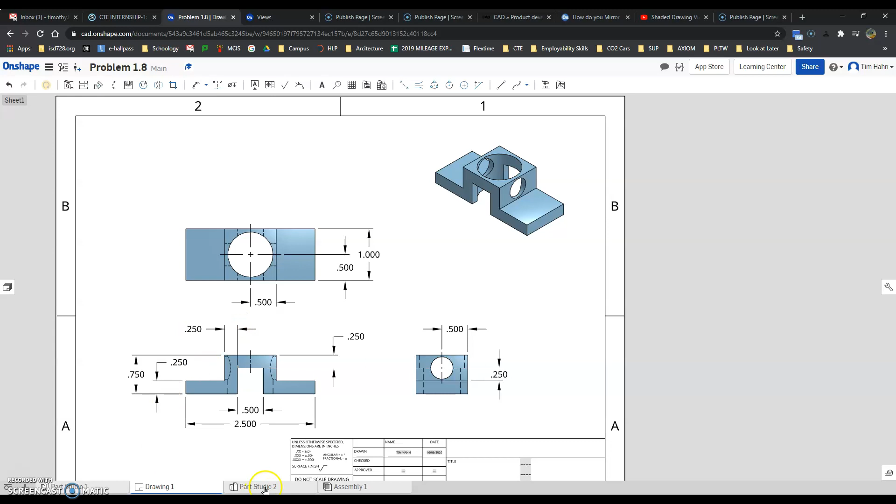So I'm going to go sketch, front view, and the difference here is I'm going to right click and go normal to sketch plane. I'm going to do a rectangle, but I'm going to do a rectangle up in the middle of nowhere, because I want this center plane here to be in the center of my part. I don't want to start it on the origin.

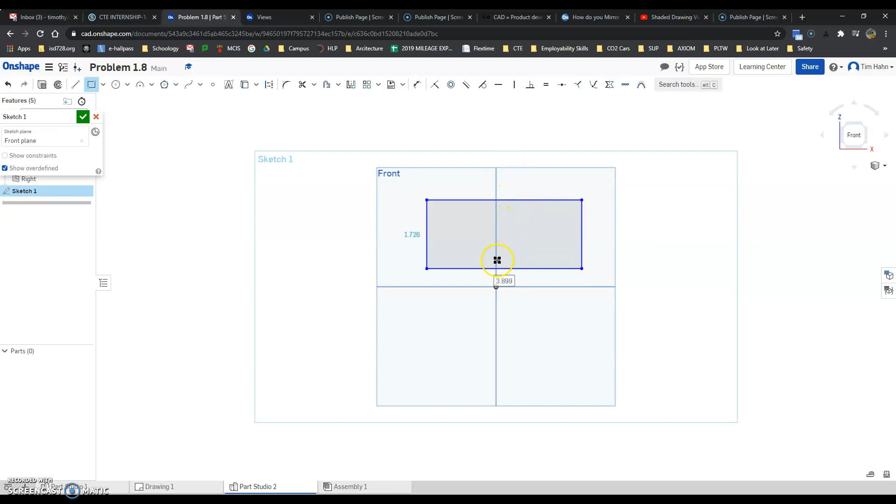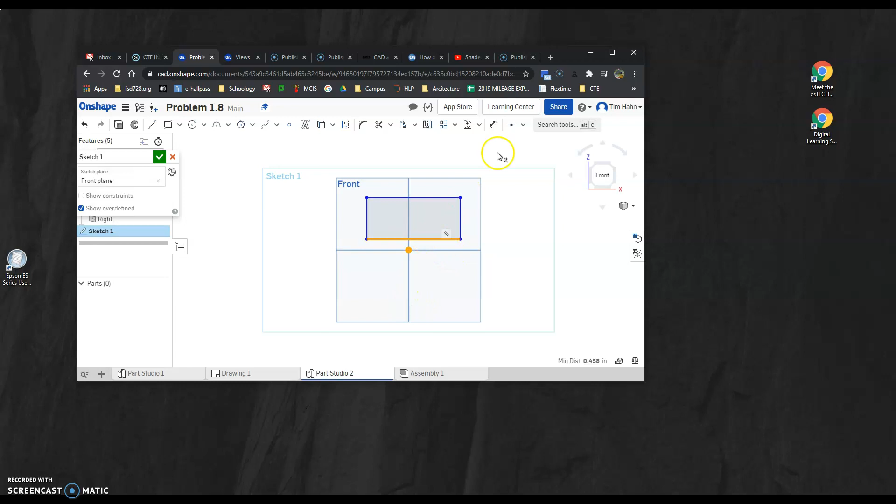So I'm going to take this item, and it might be hidden a little bit, so I'm going to show it so it's hidden. I just shrunk this down so it's hidden for you. So I'm going to click on here where it says coincident, and I'm going to go to midpoint, and I'm going to take this point and this line and lock them to midpoint to each other. So now what that's doing is if I stretch one side, it stretches the other side. So this is a symmetric part. There's a line of symmetry, or it's a mirror image right over this edge.

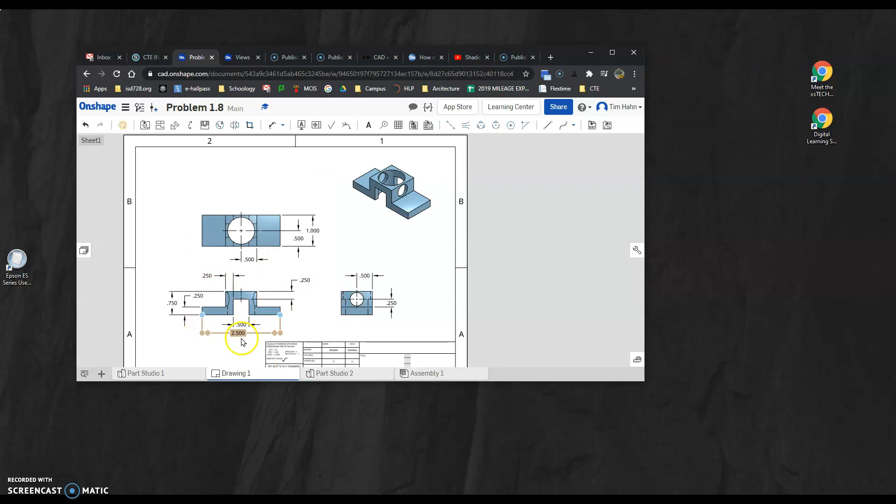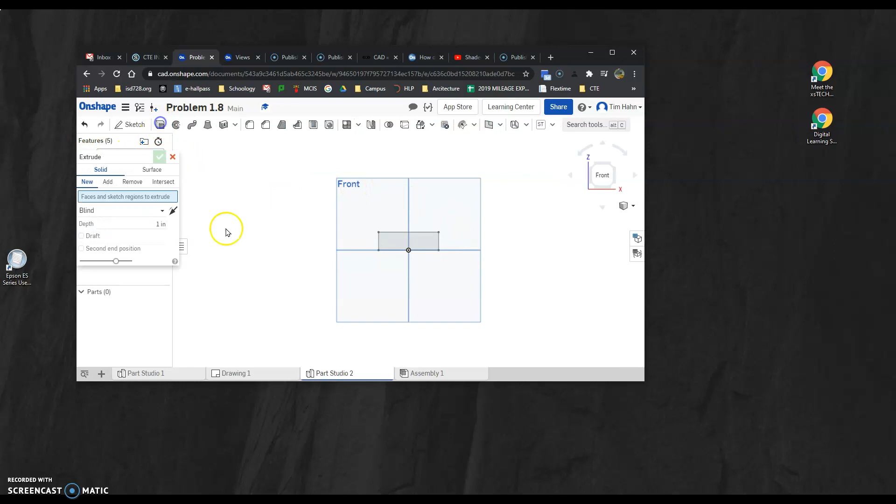Now I can do my dimensions. If I go back to my drawing, it's 2.5 wide and 0.75 tall. So come in here, 2.5, 0.75.

Check that off, extrude that, because we're going to get our base feature. I can go into isometric view, and I got to look at the drawing again quick. It goes 1 inch, so that's blind, 1 inch. I'm happy with that. So there's my base feature. So now I have my piece that's this solid out.

Next, let's manage this piece right here. Let's cut this out. If I'm looking here, it's 0.25 thick. So I'm going to draw a rectangle from this corner down, going 0.25 there. Oh wait, I have a 0.25 over here as well, but I don't know where this is, so I got to cut the center hole out first. It's 0.25 down from the top, and it's 1/2 inch wide, or 0.5 wide. So let's go catch that. We're going to do a sketch on this front surface.

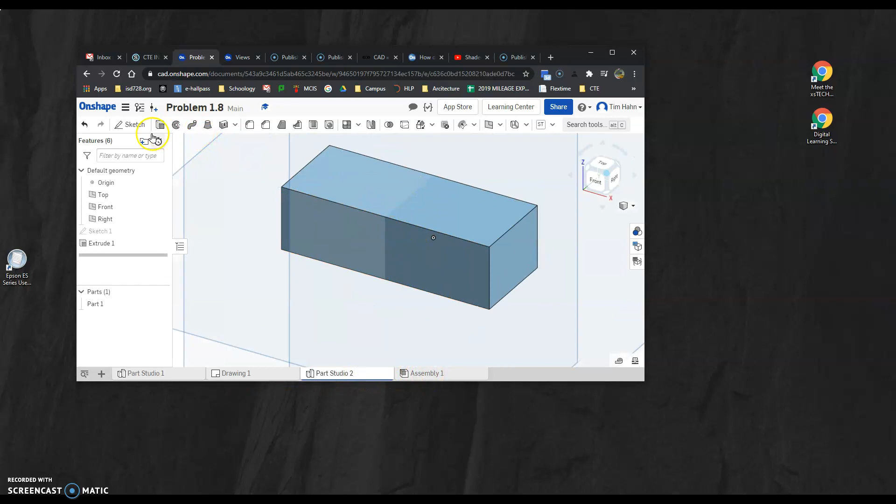Again, I'm going to draw a rectangle out in the middle of nowhere. I'm going to go midpoint again, so go here, midpoint, click my line, click my origin. Now this is staying right in the center, and I can do dimensions.

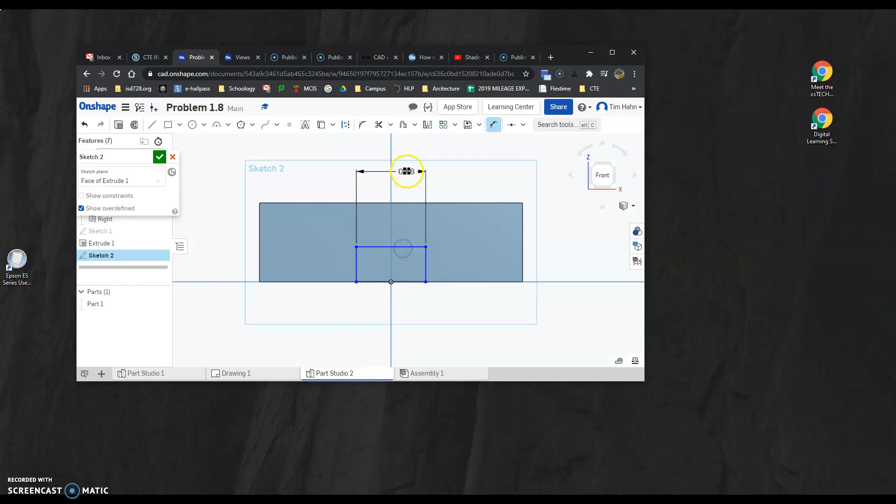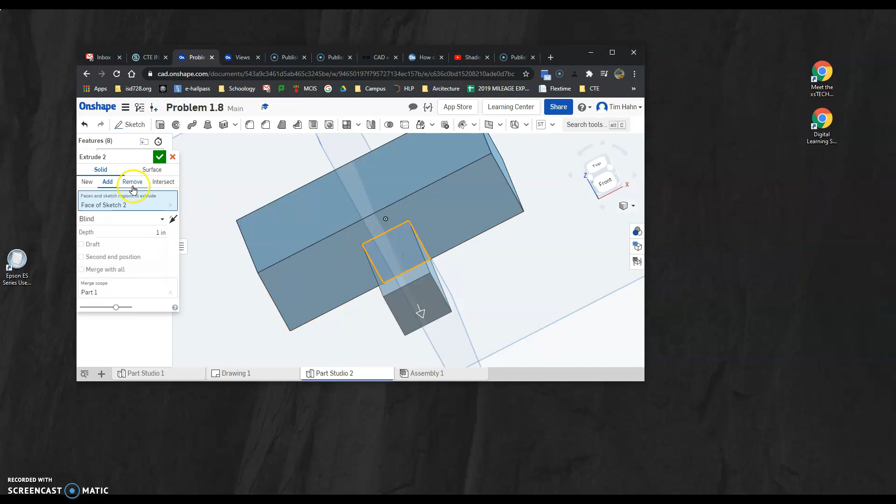That's 0.5 wide, I know that, and then from here to here should be 0.25. Check that off. Extrude. Take a look at that. Pick this, it's coming out, I got to do a remove. Instead of blind, go through all because I want to cut it all.

Set it up in isometric. If I look, now I got my cutout right here. Now I'm going to cut this corner off, 0.25, 0.25, and we're going to cut that corner.

So I'm going to do a sketch on this front face, do a rectangle, R for rectangle. Come this way, dimension. So I'm coming to my dimension tool. This line to this line is 0.25, this line to this line is 0.25. I'm happy there. Extrude. Okay, it's coming off, so I got to remove it. Set it blind, through all, check.

All right, now getting to this other side. What I could do is draw it on the other side, but I don't want to. I want this to be a mirror, and I want it to mirror over this right plane right here. So what I'm going to do is I'm going to come up into my feature area, and I'm going to teach you a new feature right now. It's an awesome one: Mirror.

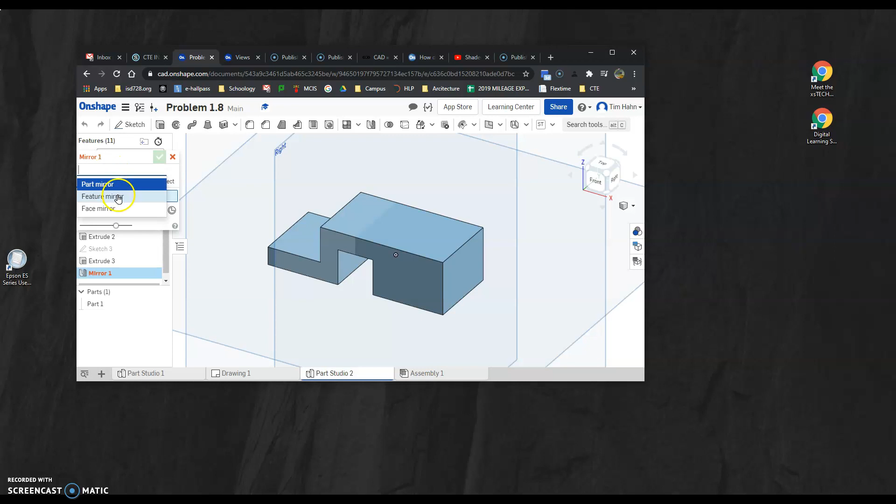Come into mirror. It says part mirror, but I don't want a part mirror, I want a feature mirror. So part mirror goes to feature mirror. Features to mirror, I want to mirror this extrude. And then the mirror plane is what I want to flip it over. So I'm going to click my mirror plane, and I'm going to click the right plane.

So I just took this cut, and I flipped it over this plane, and I hit check, and it did the exact same thing. Now the cool thing about this is, let's say I want to change what this one looks like. Come back into Extrude 3,

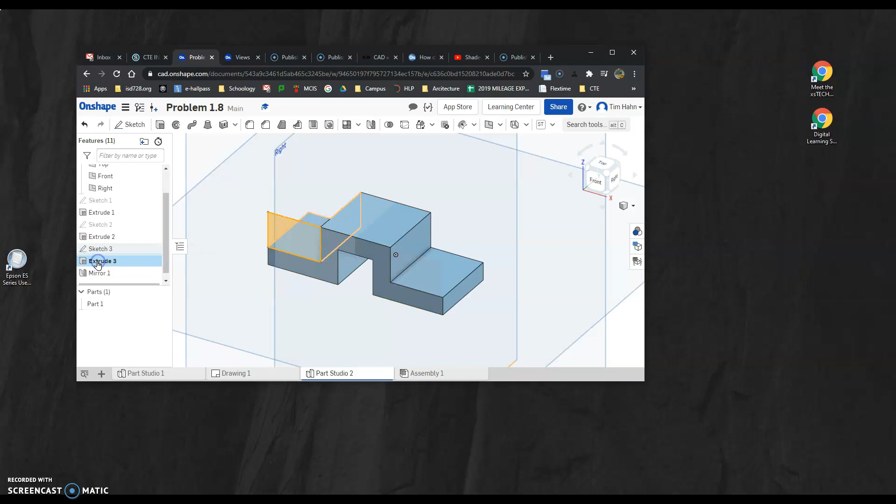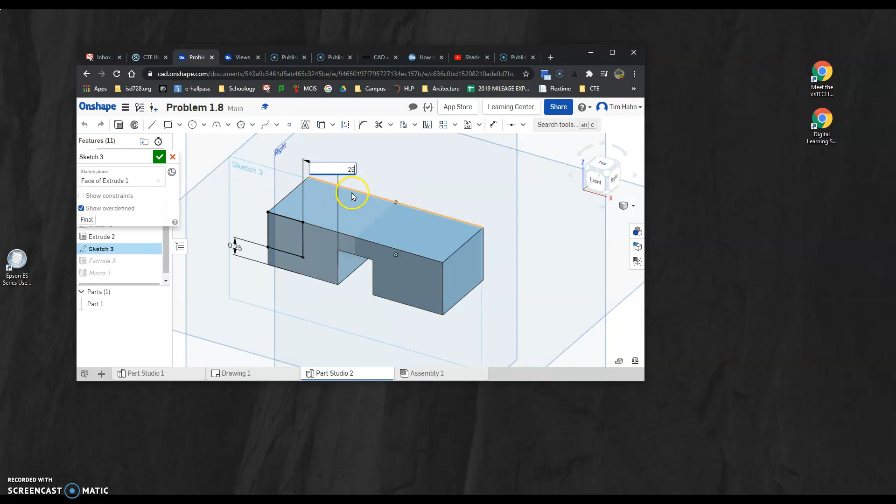Into that sketch. Let's say this is 0.5 instead of 0.25. Enter, update it, and it updates both sides automatically. So that's why this mirror is so important. We just learned a very powerful feature there. So let's get that back to 0.25 and check it off. So now we have this shape here.

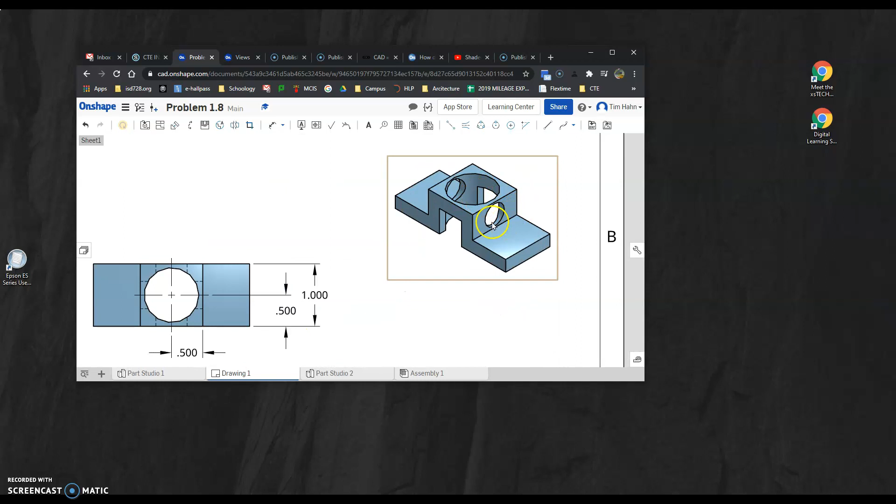So let's do the hole on the top first. If I take a look, this top here, it's right in the center, and it's right in the center. Half inch in, half inch up.

So I'm going to go to my piece, and I'm going to draw a sketch on the top. And all I want to do again is put a point on the top. That's where the center of this hole is going to be. And I'm going to line it up with the midpoint here or the midpoint here. So I didn't click it at all, I just hovered over those two midpoints, and it woke up those items.

Now that's centered. I can't come in here and move this at all. So it's in the right spot because it's centered with those. And remember, I'm done with that sketch. Now I'm going to come in and do my hole.

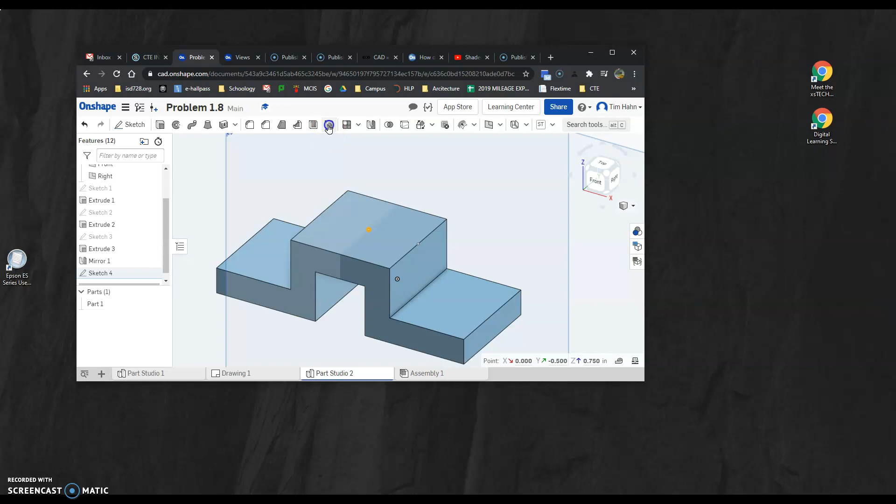The hole's got to go to a simple style, the through hole. And we want to go into custom. So I just want it to go through everything. I don't want it to go blind. I want it to be simple, not counterbore, countersink. And custom hole. And if I take a peek at my drawing, the diameter,

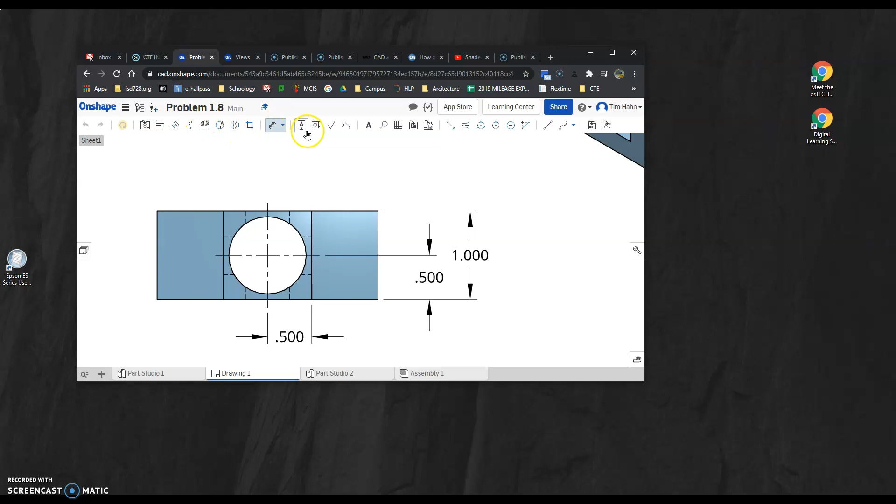And I'm going to have to do a hole call out here. The diameter of this hole is 0.875. There, I added that diameter in there, 0.875 there, and it's a through hole. So I'm going to come back to that. And I made sure it's 0.875, made sure it's through, hit check. Got that hole taken care of.

Next hole we're doing, I'm worried about over here. It's a 0.438 through. It's a half inch in. It's a halfway up. So again, I'm going to make a point on this surface, halfway,

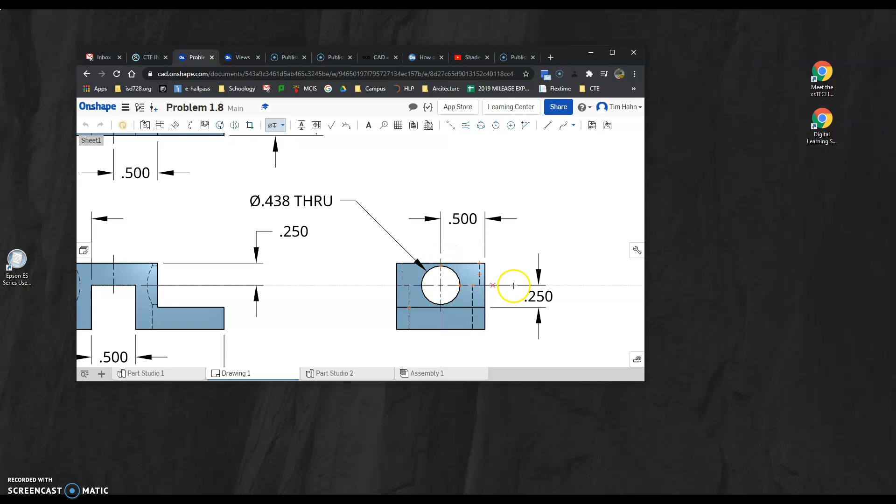0.438. So coming over here, sketch on this side wall, put a point on this side wall, and again, I'm going to come over here and wake this one up, highlight over this side, come to the midpoint, wake this midpoint up, and I just keep sliding around until I get them both lined up.

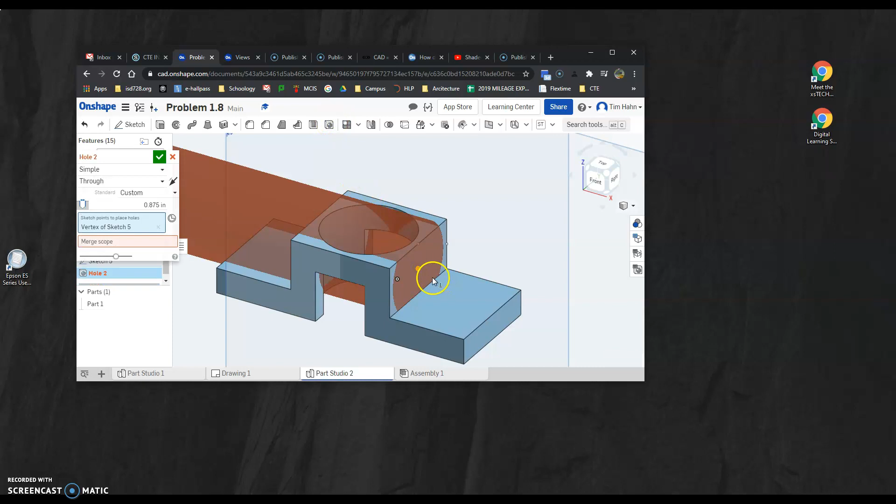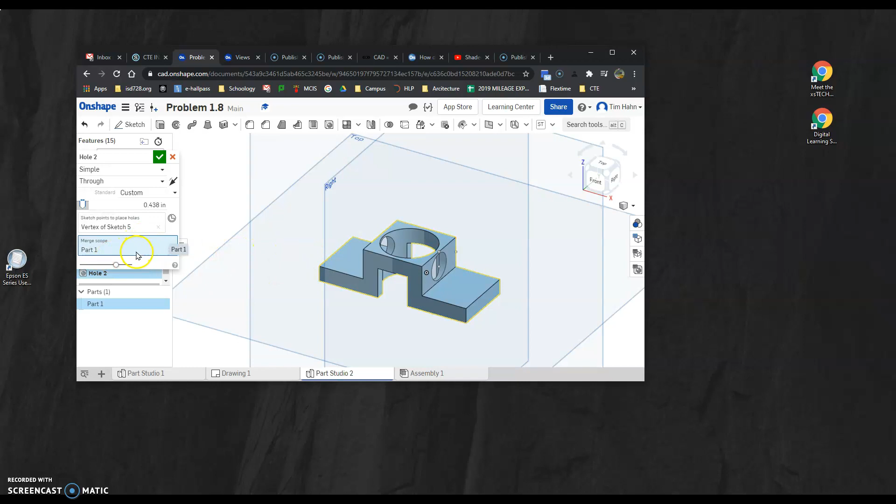Check that off, make a hole, and it's giving me this big problem. So I want a simple hole. I want it to be through, 0.438. Custom, 0.438. Hit merge scope if it's giving you a problem there. And hit the check mark. And now we have this part taken care of.

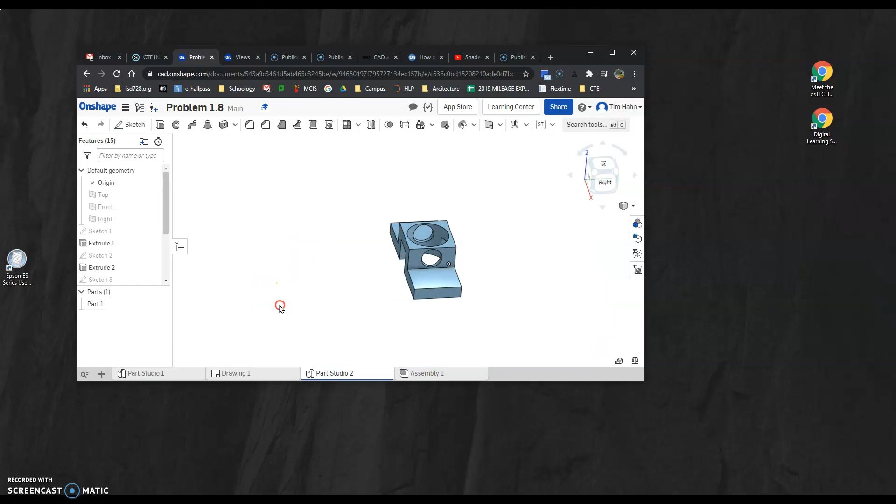So if I go back and take a peek, it looks like this part here. I'm happy with that. Hit P to get rid of planes. Right click, isometric. Open up your mass. Let's see what we have for a mass. And I'm going to zoom out a little bit so I can see it now.

Mass of part 1 is volume is 0.607. Get your name on it, screenshot that, and upload that. We've learned how to do mirrors, and we've learned how to do holes. Awesome work.